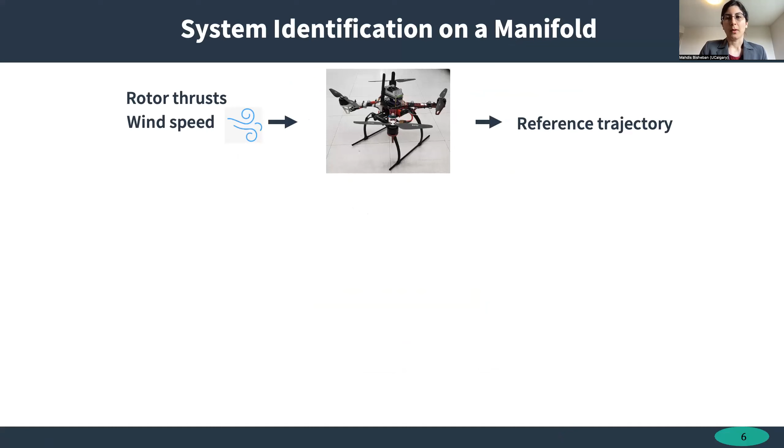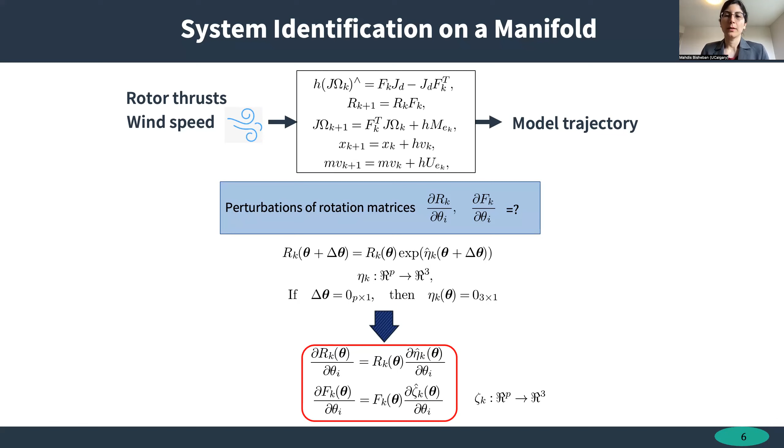So here to present the key idea of the proposed identification method through a concrete but non-trivial example, I explain it for a Quadrotor UAV. We replace the Quadrotor UAV with its mathematical model. Our goal is to have the same output if we give the same input to the model, by identifying unknown parameters in the dynamic model. To do so, we need to define sensitivities in the tangent bundle of the configuration manifold. I have defined a matrix shown by eta here, which includes information about the direction and angle of rotation due to the perturbation. Skipping the details, we accomplished defining sensitivities on the tangent space.

And here we see the computational framework for the identification of the Quadrotor UAV's model parameters. Here the input to the estimated system is rotor thrusts. Again, we compute the trajectories and sensitivities of the trajectories to the unknown parameters. Then, having the reference trajectory, we compute the necessary conditions for optimality and repeat this process until those conditions are satisfied. We use this procedure to estimate Quadrotor parameters. Then, having a good identified model, we can estimate wind.

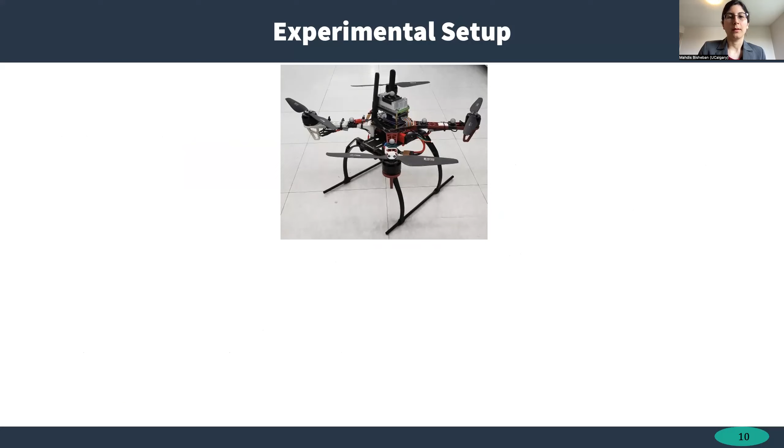So to take theory into practice, we have built our own UAV, and here we use brushless DC motors, carbon fiber propellers, electronic speed controllers, IMUs, and an onboard computer, NVIDIA Jetson, running the Linux operating system, doing all computation for autonomous flight, and information about position and attitude is provided through a motion capture system. This was done indoors. And also we have worked on developing the flight software using C++ in our lab.

So here to show wind effects clearly, we used the same industrial fan. And in this experiment, 2 autonomous drones are hovering pretty well while restricted to a spherical joint. So they are free to rotate, but cannot move. And when they are hovering, I suddenly turn the fan on, and we see that on the right, the drone cannot maintain its attitude and fails, but on the left, the controller with neural network, we do not see any observable change in the performance after we turn the fan on.

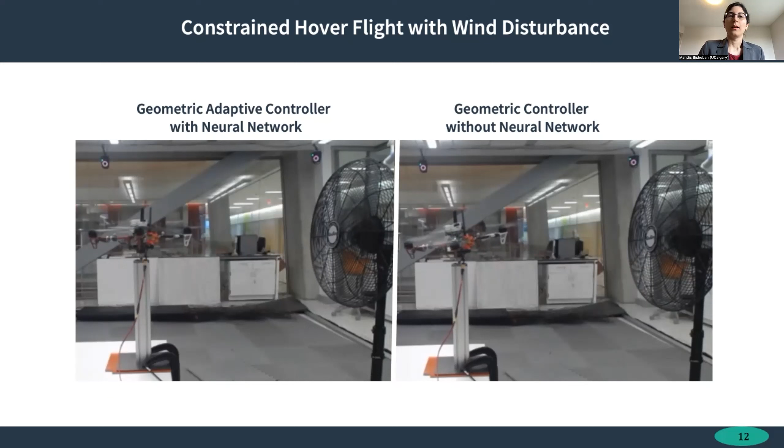Okay. So here in this slide, we see autonomous flight of 2 drones that are hovering. Again, here initially there is no disturbance, and I suddenly turn the fan on, and we can see that the quadrotor with neural network on the top can maintain the desired position and attitude, but the other one struggles. So let's see the video.

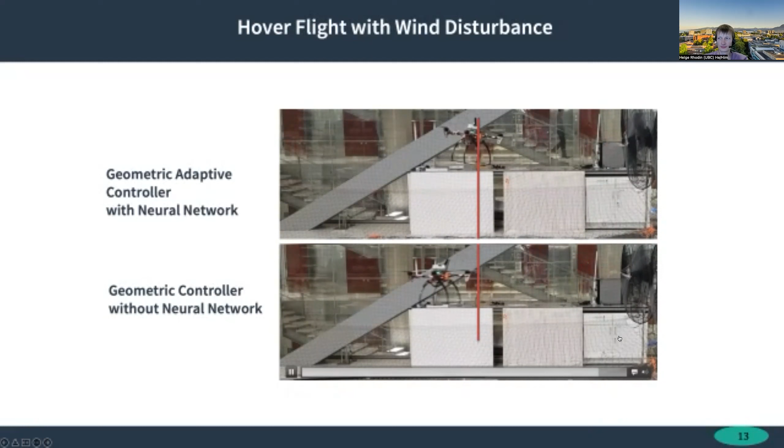Okay, so let's go to the next slide. So now let's see an autonomous 360-degree backflip in front of a fan, and a quadrotor here. Actually, a quadrotor is an under-actuated system because there are only 4 thrusts to control a drone in 6 degrees of freedom. So a backflip is not a simple trajectory to follow. And here we did not use the neural network, and we can see the drone fails.

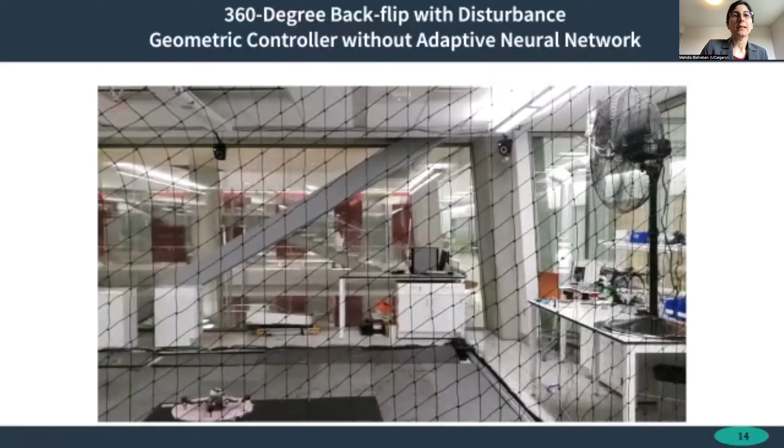However, in the next slide, with the same trajectory and in the same situation, we are using the adaptive controller to do the 360-degree backflip. And the drone can successfully do that, and I have to say that it's a repeatable achievement. So not only just one time.

So yeah, that actually concludes my presentation. So if there is any question, I would be happy to answer. Thank you for the interesting talk. Are there any questions from the audience? No, good. Okay, Ed, go ahead. Yeah, I always have one.

I have a comment on what you mentioned initially, the representation you use, and that you chose to have a rotation matrix which you ensure stays in SO3. A couple of years ago in computer vision, they switched to using the 6D representation, where essentially you use the first 2 columns of the rotation matrix. And then because the third one needs to be orthogonal, you can infer that. And to make it a rotation matrix, you would always normalize and make the first two orthogonal.

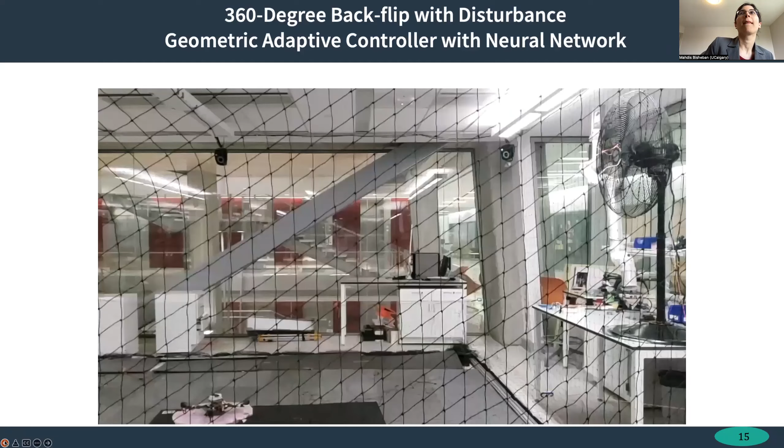Oh, that's us here in the viewing room. I'm Steve Waslander. I was just curious, most of your experiments seem to have steady state wind disturbance. Did you look at sort of time varying, like gusting wind? Yeah, I can show you the plots that we had here.

Yeah, I had a question. For the part of the model that is adaptive over time online, are there ever any issues of some sort of distributional shift, or almost like a catastrophic forgetting that might lead to a decrease in performance as the parameters update online? Or is it always typically stable behavior that you've observed?

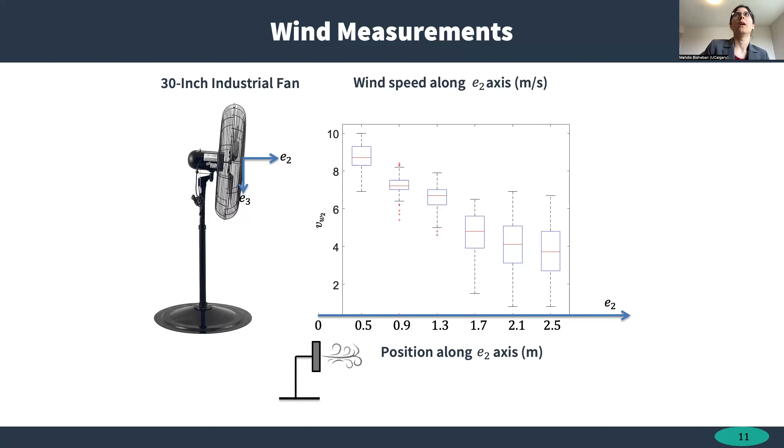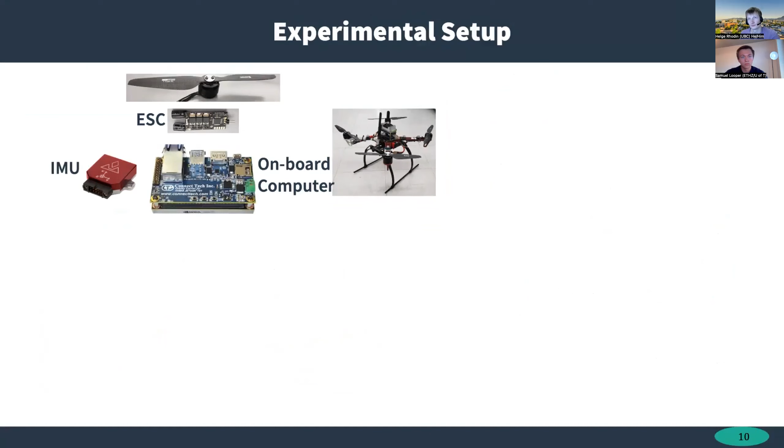I haven't seen any decreasing behavior. The trajectories that I chose, so the 360-degree backflip was very short, but there is another trajectory for maybe a couple of minutes, where the fan is here, the quadrotor flies from here, comes toward the fan and goes back.

And I haven't seen the deterioration in performance during this trajectory, but it wasn't very long, maybe a couple of minutes, not more than that. I haven't tried that. Yeah, great, thanks. Okay, thank you.

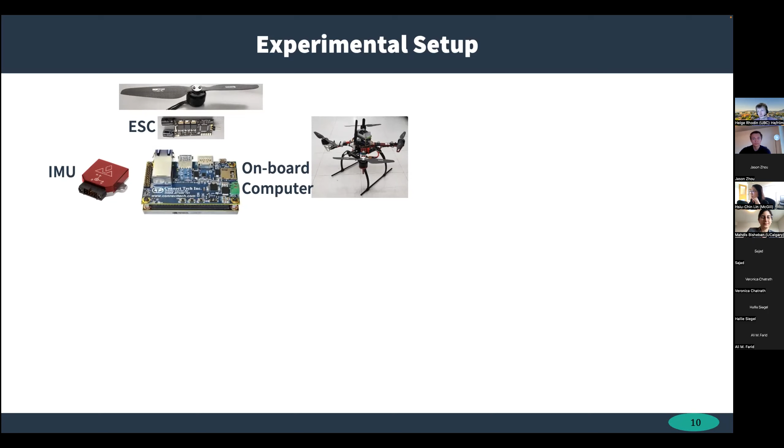Any more questions? Okay, I have a quick question. If we bring your robot to somewhere that the wind is constantly changing directions, like for example in Scotland, the wind coming from all directions and super strong, do you think the method will still be able to adjust to that?

So for sure, there are different constraints for a UAV, right? First of all, the amount of thrust that a UAV can generate depends on the hardware, right? So we cannot say this method works for wind which is, I don't know, maybe 20 meters per second, so it depends on the hardware that we have.

Sometimes the controller wants to generate more thrust than is possible with the hardware. So we have the actuator saturation issue here. So there are limitations based on the size of the quadrotor, the size of rotors that it has, and the amount of wind. Okay, thank you. Ali?

Thank you very much for your presentation. I'm wondering if there is any possibility for adding online training for your neural network while it's flying, to improve the performance. Have you? Yeah.

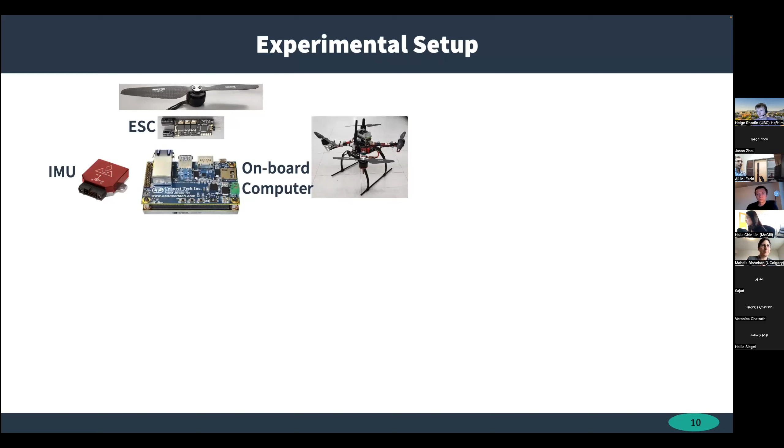So we have two presentations here, and one is called ROS-X-Habitat, Bridging the ROS Ecosystem with Embodied AI by Chen, Yang, and Dr. Mitchell. And the next would be Temporal Convolutions for Multi-Step Quadrotor Motion Prediction by Looper and Dr. Waslander. So I would like to welcome Chen to share the slide and start the presentation.

Yeah, thank you very much for the introduction. I want to double check if you guys can hear me loud and clear. Yes, that's good. Okay, awesome. Yeah, I think it says I cannot share my screen right now because of another. Mahdis, I think you need to unshare first. Okay, give it a try. Yeah, it is working now.

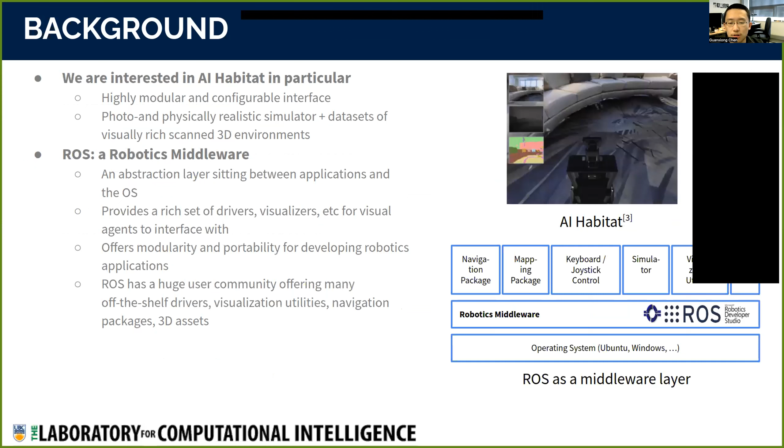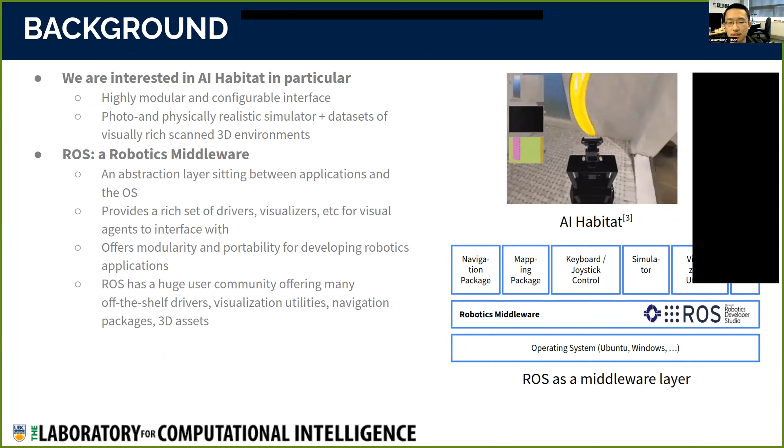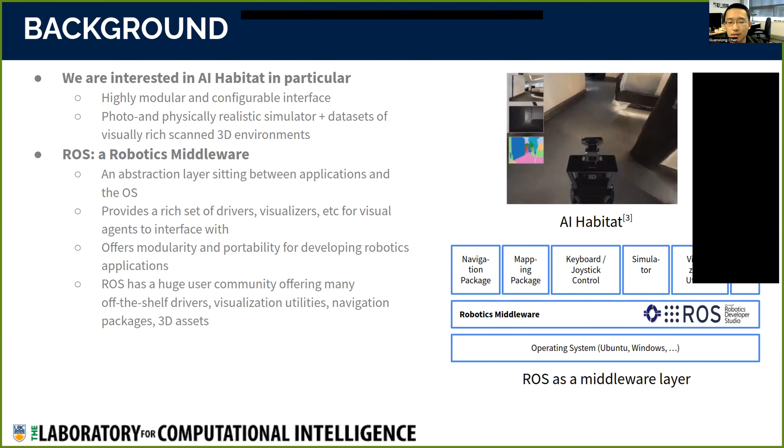Although many platforms exist for training and testing such agents, we're particularly interested in AI Habitat because of its configurable design and, more importantly, its photo and physically realistic simulator. Another line of work we look into is the robotics middleware, specifically ROS, which offers a large arsenal of drivers and utilities to streamline the development and deployment of robotics applications. However, deploying agents trained under Habitat in the real world has not been a walk in the park because the platform did not come with a rich set of drivers and debugging utilities.

Although an existing work attempts to bridge the two ecosystems, it does not integrate Habitat's physics-based simulation support and offers little customizability. Without the support of physics, we wouldn't know if Habitat's visual navigation agents trained in a discrete action space can still perform well when running in a continuous action space with real-world dynamics fully simulated.

Another problem. You still have your Zoom windows open on the right, so we see a bit of black box. Oh yeah, sorry. You can move them, then we see the whole screen. Is it working better now? No, it's on the left. I don't know if you can close that entirely. Yeah, let me see. How about now? Yeah, now it's gone. Yeah, that's great. Okay, that's awesome.

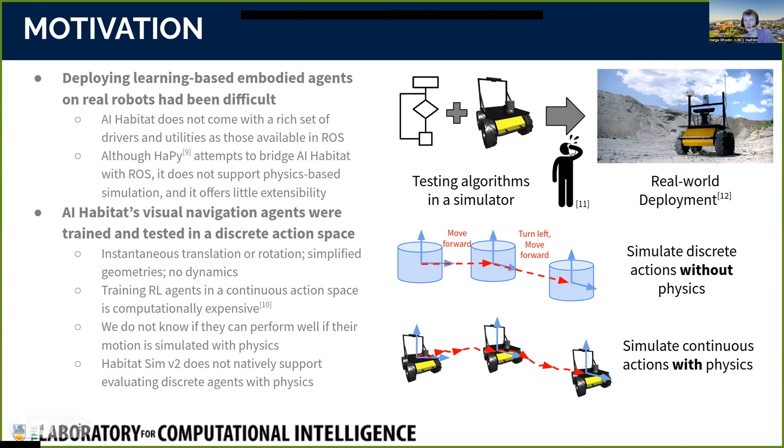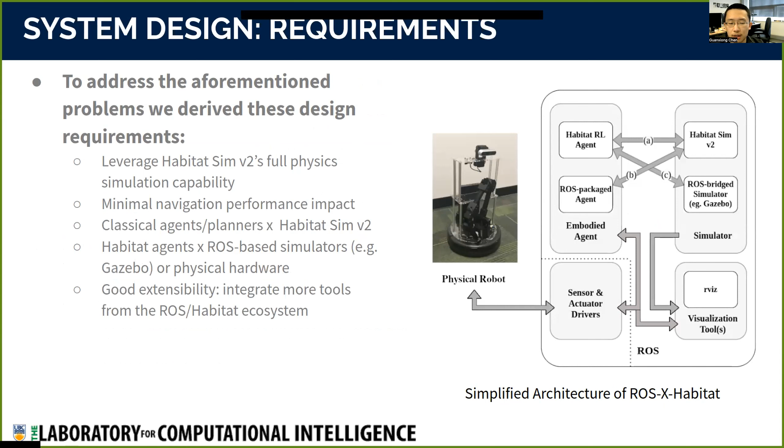Great. So another problem with the ROS ecosystem is that Gazebo, while being the canonical choice of simulation in the ROS community, lacks the level of speed and photorealism for effective training and testing of learning-based agents. So we aim to develop an interface that bridges the two ecosystems in order to take advantage of the strengths of each. To address the problems with the existing work, we derived the following requirements for our interface. It should allow both classical and learning-based agents to be tested under Habitat's full physics-based simulation environment while introducing minimum performance impact. It should also streamline the process of debugging learning-based agents and deploying them in the real world.

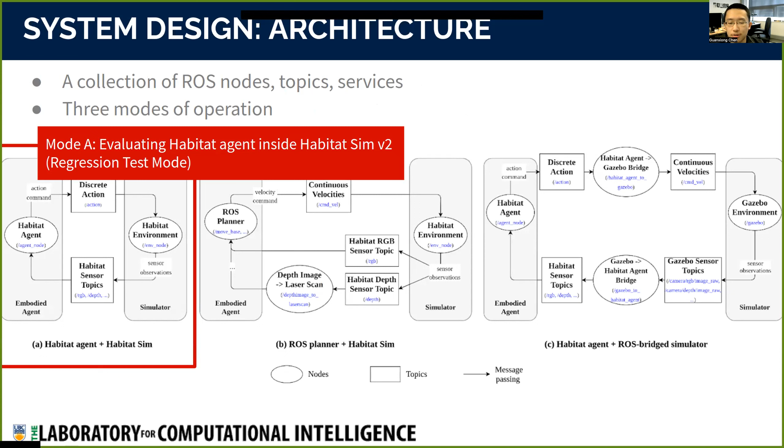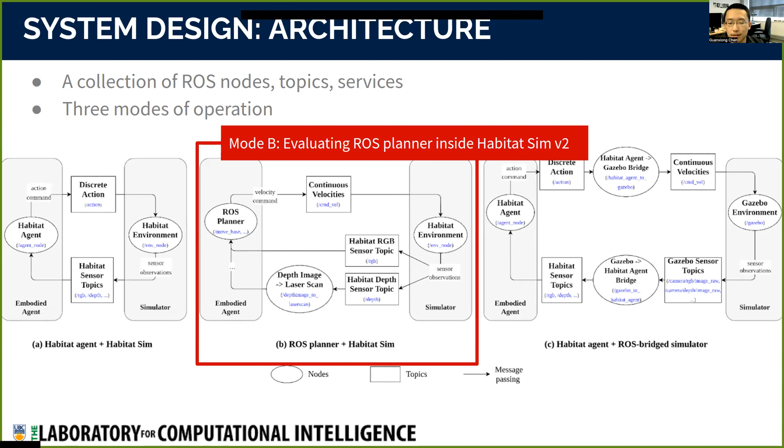We implemented our interface as a collection of ROS nodes, topics, and services, and exposed them fully to users for customizability. We can run it in any of the three modes of operation. Under mode A, which we refer to as the regression test mode, we can run a Habitat agent inside Habitat Sim. We'll explain later how we use this operating mode to evaluate the performance impact of our interface on evaluating agents. Under mode B, we can run a ROS-based planner inside Habitat Sim to take advantage of its photorealism. Under mode C, we can run a Habitat agent inside a ROS-bridged simulator, such as Gazebo, for debugging. We use this mode to demonstrate that our interface can be easily extended to bridge Habitat agents with other ROS-based utilities, so streamlining their physical deployment becomes possible.

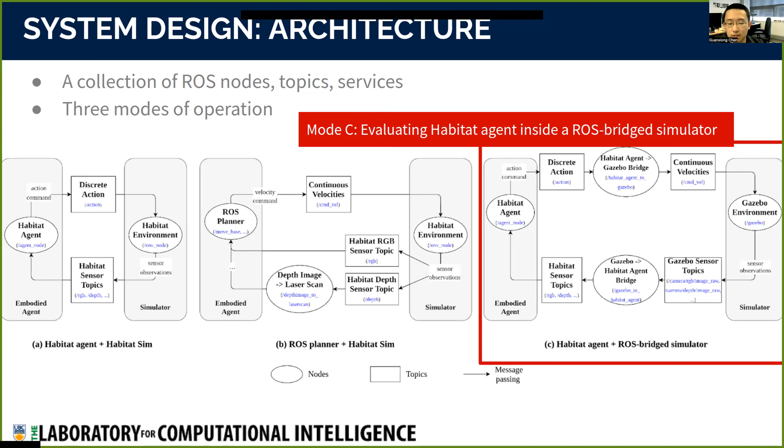We required our ROS bridge to be able to leverage physics, but not degrade navigation performance too much or introduce unacceptable running time. So we'd like to ask, if we test a Habitat agent trained in a non-physics environment under physics, is it still going to work? Is navigation becoming unbearably slow? So we evaluated a pre-trained Habitat RGBD agent on the PointGoal navigation task using over 1,000 episodes from the Matterport3D test set with the SPL metric under two configurations: discrete actions, time-stepped by a non-physics-based simulation engine, or continuous actions, time-stepped by the physics-based Bullet engine. We did the evaluation entirely under the Habitat framework without the ROS bridge.

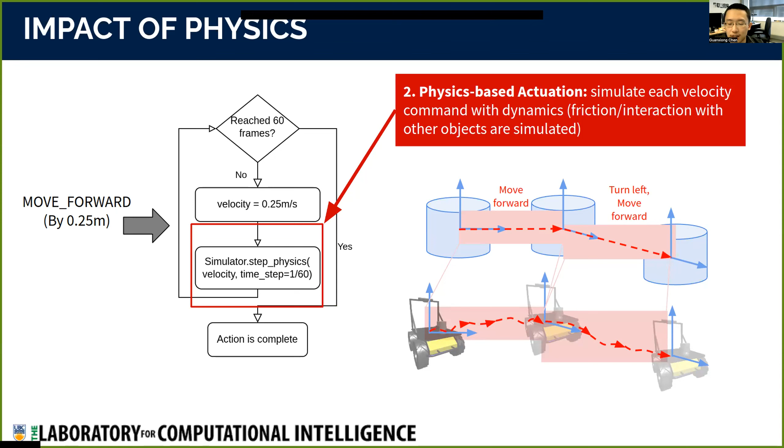Under the second configuration, we first map each discrete action, for example, move forward by 0.25 meters, to a sequence of velocities. Then at each time step, instead of teleporting the agent from one state to another, we simulate a non-ideal actuation, taking account of dynamics such as friction and interaction with other objects. Also under physics-based simulation, we simulate the fine geometry of an agent.

We noticed that the metric drops slightly from 0.495 to 0.455 after we introduce action mapping and non-ideal actuation. Looking into the failed cases, we see that after turning on physics, the agents can no longer penetrate a wall or climb upstairs. Runtime-wise, we noticed that the time to evaluate the entire test set increased significantly, but the modest performance drop in navigation confirms that because a discrete agent can still perform fairly well when simulated with physics, we can effectively mitigate the runtime impact by only turning on physics during validation or testing.

And another question we want to ask ourselves is, after placing the agent and the simulator inside ROS nodes, does navigation performance stay the same? And is runtime still reasonable? So we evaluate the test set, both with and without the interface. And in each case, we tried discrete as well as physics-based simulation.

So we found that after introducing the ROS bridge, navigation performance is nearly identical, and runtime overhead due to ROS communication is still acceptable because we can achieve real-time performance. Also under mode B, our interface allows users to plug a classical ROS planner into Habitat Sim to take advantage of its physics-based photorealistic simulation.

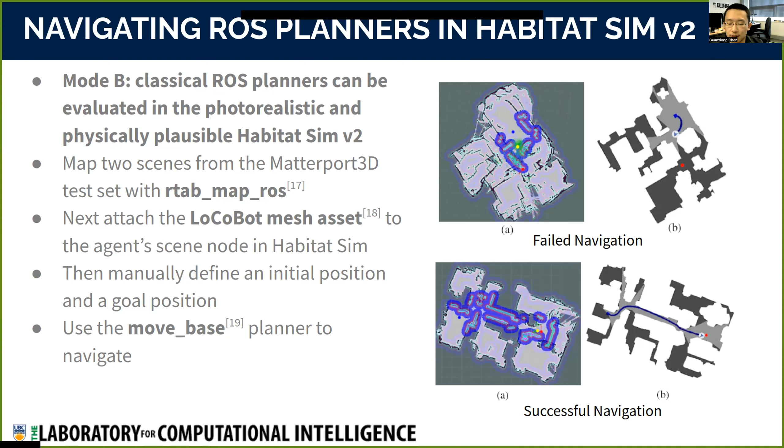And here we mapped scenes from the Matterport 3D test set, attached the LoCoBot model to our agent, and constructed two navigation episodes for the move_base planner to navigate. And under mode C, we show another use case where users can plug a Habitat agent into Gazebo for the purpose of debugging. Moreover, we use this case to demonstrate that it's possible to bridge a Habitat agent with hardware utilities under ROS.

So in conclusion, our ROS bridge makes the following contributions to the community. It grants Habitat agents access to ROS utilities, but also allows ROS-based planners to operate within the physics-based and photorealistic Habitat Sim. The extensible design allows community members to make further contributions. In the future, we plan to integrate Habitat agents trained for more tasks, develop more tools for testing classical planners in Habitat, and also implement a physical deployment pipeline.

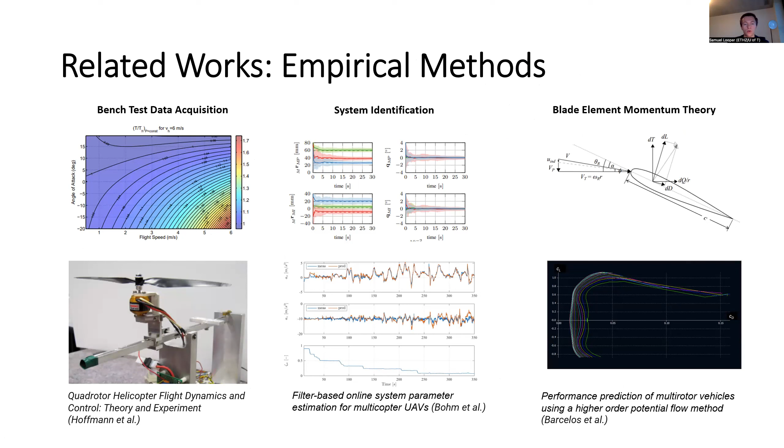So other works use empirical methods or use basic system identification to try and get the value of specific parameters under specific flight modes and for specific aircraft. However, this ends up requiring a lot of effort, and the resulting models typically work over smaller time horizons, after which state disturbances and unmodeled phenomena typically dominate.

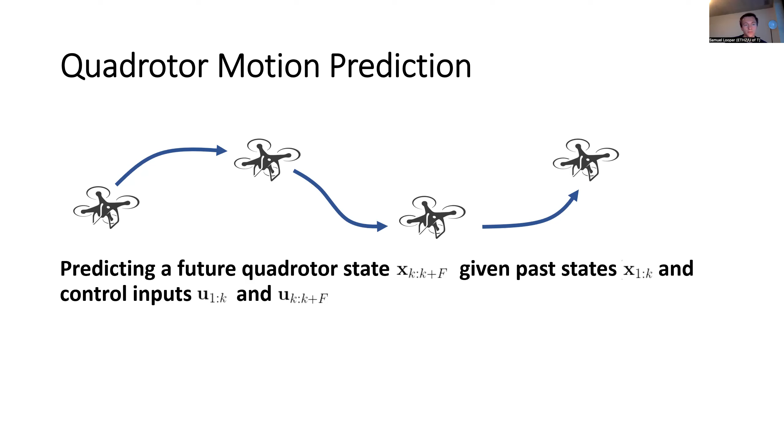And so as an alternative, we've decided to reframe this problem in a model agnostic way that might be a little bit more familiar to those in the machine learning community. We simply try and predict a future quadrotor state given a series of past states and a series of control inputs. In essence, this is a time series predictive modeling problem.

One important feature is that by using a history of previous states, our quadrotor state no longer has to be fully Markovian and include all of our system dynamics, but rather these more complex dynamics only need to be partially observable in our data for us to make meaningful predictions. So once we set it up in this manner, we can then leverage any standard learning-based sequence modeling methods, which have gotten better and better as the state of the art has advanced over recent years.

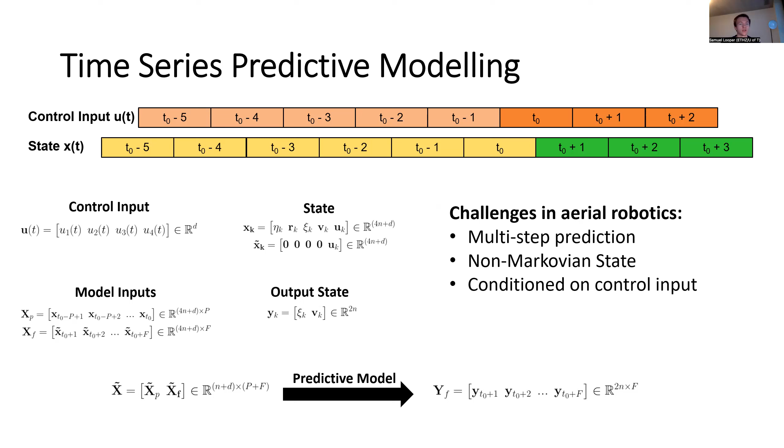However, one extra key difference is that our future predictions are conditioned on our control input, which is kind of the fundamental issue with control systems. So the way that we address this in our research is very simple. We augment our state with the control inputs and provide our model with both a past state matrix and a future state matrix that has the control input but that masks the kinematic state.

Once we frame the problem this way, we can look at various methods of modeling sequences. When it comes to quadrotors, multi-layer perceptrons and recurrent neural networks have been used for tasks like these, but new architectures are emerging in other fields that provide some significant benefits for modeling dynamical systems. And so in our work, we studied the application of temporal convolutional networks for quadrotor motion prediction tasks. Temporal convolutions make slight modifications to dilated convolutions, and provide us with an architecture that is very well suited for operating over one-dimensional time series.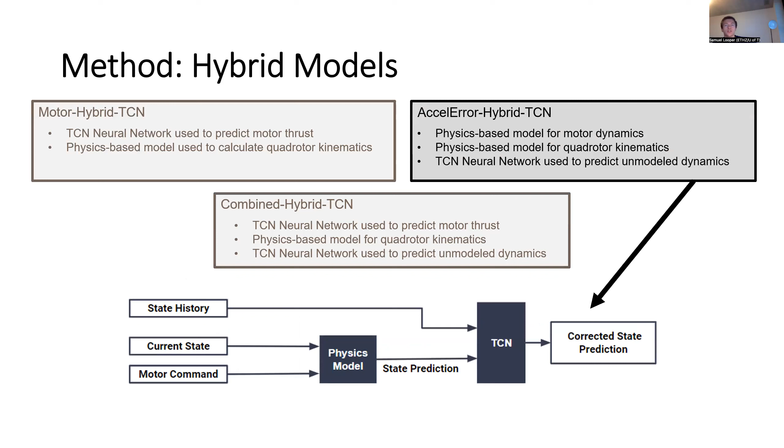We have another configuration here where the TCN learns essentially a residual term on top of the physics-based model, which you can think of as all the unmodeled aerodynamics and other effects that might not be considered. And then lastly, we can combine both of these approaches. Overall, we see that these types of TCN hybrids do provide a slight improvement over physics-based models or the state-of-the-art in RNN LSTM hybrids over longer time periods, which is interesting.

Once we established this, we also performed an analysis on model scale, where we found that the performance plateaus at a certain model scale, which is an interesting thing to think of. Here, the scale is a function of the number of layers that we added to our network, and ultimately the number of parameters. However, at a certain level, adding more parameters doesn't improve performance. We believe that now data becomes the most important bottleneck in our model's performance.